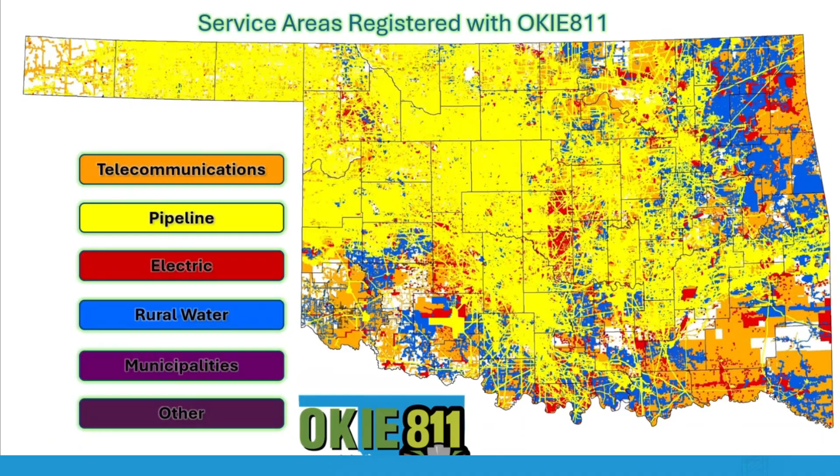Now, I'm showing you guys a digital map of all the underground assets in the state of Oklahoma. You're seeing all the utilities - electric, gas, water - and where they are in the state. You can see how much underground infrastructure is in Oklahoma. At the very end, it's almost all painted, like a kid with a crayon coloring the whole state.

That's how much underground infrastructure there is, and that's why it's so important to contact 811 before digging, because the chances of hitting a line are pretty high. I think it's a national statistic that every 6 minutes in the United States a line gets hit. That's how important it is to contact 811. We want to make sure you know where you're digging, to protect the underground and protect yourselves so you don't get hurt or something worse happens.

Now I'm going to turn it to my colleague, William Bohana, who's going to start with the 5 steps of safe digging. He's going to start with steps 1 and 2. Bo, the floor is all yours. He's going to start with step 1, plan and prepare, and why it's so important to know that before you submit a locate request.

A very important key piece to any project is to plan effectively - if you fail to plan, you plan to fail. Before submitting a ticket, it's important to get all kinds of information, because this is where a lot of problems can start well before digging begins. You must take time to identify where and when you will be digging. Consider walking the site, looking for signs of potential hazards, not only utilities themselves but environmental hazards as well. You want to understand exactly what you're doing and consider all kinds of potential issues that can come up.

If it's weather, because it's Oklahoma, give it 5 minutes and it'll change. Considering potential access issues is important too, because locators need to go in and get their job done. If you're working in a rural area with livestock, that can be an access issue for the locator. Of course, you want to gather all of your details to make a complete and accurate locate request - location, driving directions, what type of work you plan to do, all of that.

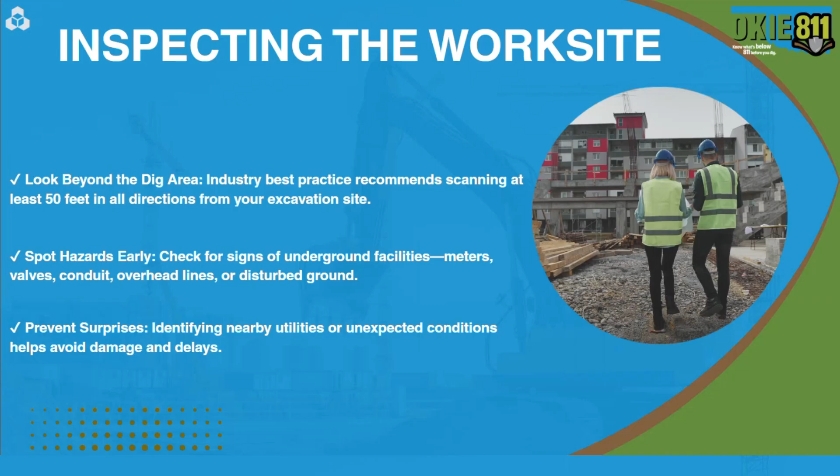So talking a little bit more about that documentation, you want to do your homework. This is still planning and preparing, getting those land records, GIS maps, survey drawings, plat maps, and you can request those through OKIE811 as well. Having that information is going to help set up the next steps to be successful.

You won't always know what's below. This is why it's important to pothole and plan effectively when working around utilities. But these tools can help you identify those potential facilities in that area.

A big one we'd like to talk about that is very important is to document. We want to make sure we have our job hazard analysis, our emergency action plan. You want to make sure your SOPs are ready to go. I know it's a lot of buzzwords and jargon, but it is important and it does have its place on the work site. Having that documentation and having a timeline can help if something does happen and there is an issue. Who do we contact? What do we need to do? What steps have been taken afterwards? So all of that documentation can help everything you found about that site to be more easily communicated.

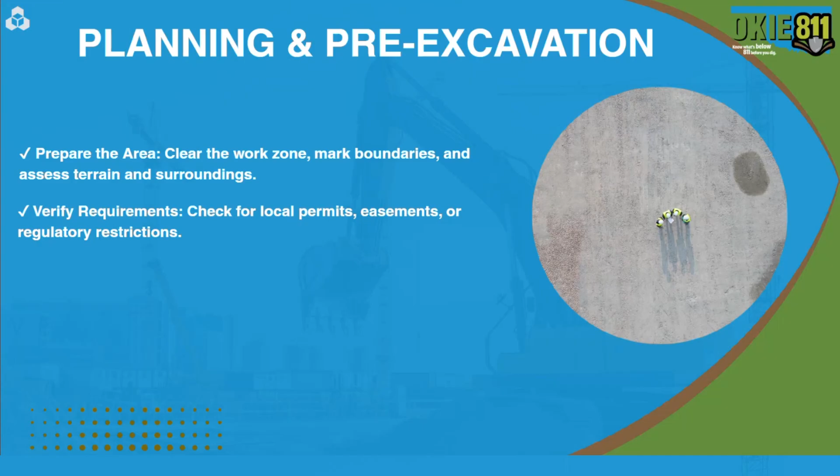Again, having a plan, very important. Emergency action plans save lives. Accidents happen. Having steps to address that is very important. Of course, planning effectively is all about mitigating those accidents, mitigating those hazards, making sure everything can go as streamlined as possible. But like I said, accidents do happen, and we're at that time of year where we're hitting triple digits. If you're working outside, heat stress related incidents occur quite a bit. So emergency action plans are always helpful for a variety of issues.

Now, white lining, and I'm going to ask you all to participate in the chat here. White lining the site using paint flags, other approved methods, to mark a proposed dig area. How many of you white line? It is an industry best practice to white line. It's not a requirement, but it does help give a specific dedicated space for your excavation, as well as show those locators exactly where you plan to work.

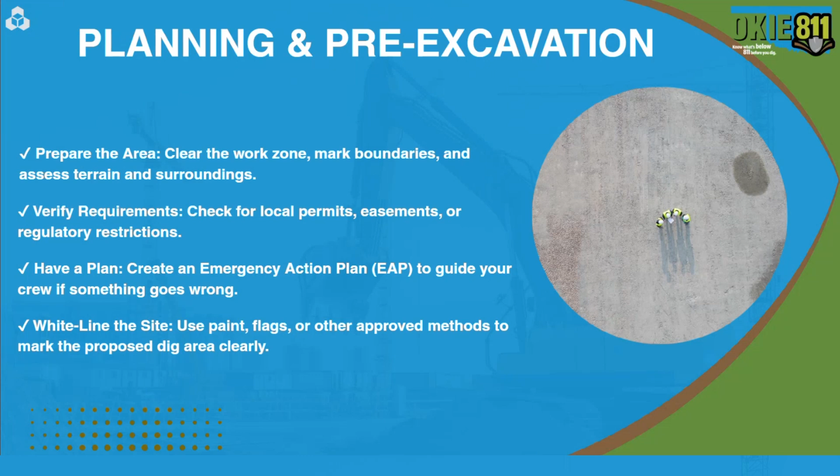So let's look at a couple of those examples real quick for that white lining. These are the three main examples: point radius, linear path, and perimeter. That point radius is great for installing a mailbox or planting a tree. It's just a single point that you use a white flag, or a great example, we were having a discussion with someone, and they said they just put a soda bottle on a tree because they were planning to remove that tree. It's something identifiable, something that they communicated with the locator that, oh, this is my quote unquote white lining, because it is very noticeable. So it can be another approved method of identification of where that area is going to be.

Linear path, great for a French drain. It is what it sounds like. You're just putting a line down and saying, if I'm putting in a French drain or an irrigation system, I'm going to mark out where that system is going to go in. I probably need about 2 feet either side of where the markings are.

And then perimeter all within, pretty standard. Great for a foundation, right? Mark everything within this box or this shape that I'm going to be installing a pool, putting in a shed, something that you can use more of a larger mass for.

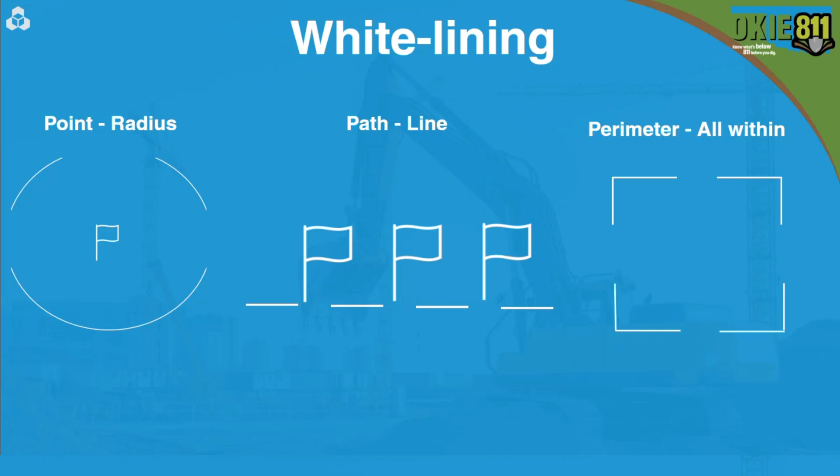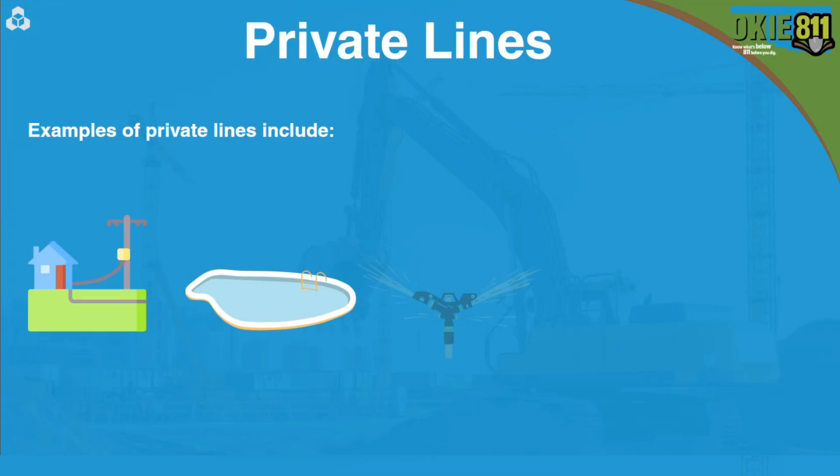Now, what about private lines? Talking about putting in that irrigation system or French drain, etc. There are a variety of private lines that can affect an excavation. That could be electrical lines from the house to an outbuilding, gas or electric lines for heating a pool, water lines for that irrigation system, or propane lines to grills or, in rural areas, even to houses. Any kind of lines that go after the meter are the homeowner or landowner's responsibility.

Now, talking about them, what do you do around these private lines? You have to have that conversation with the property owner to know where those lines might be, and determine whether or not that damaged line can be repaired safely on site, or if a private locator should come in. It is very important to have that solid communication if that work is being done.

So let's say a contractor suspects a private electric line runs through a backyard to a shed. The homeowner says, yeah, we do have that. So the contractor starts the conversation: do we know exactly where it is, how large it is, what can we do to work around that? It is the homeowner's responsibility to bring in a private locator if those lines need to be worked around. So having that communication, having that dialogue is very important, since those lines are the property owner's responsibility.

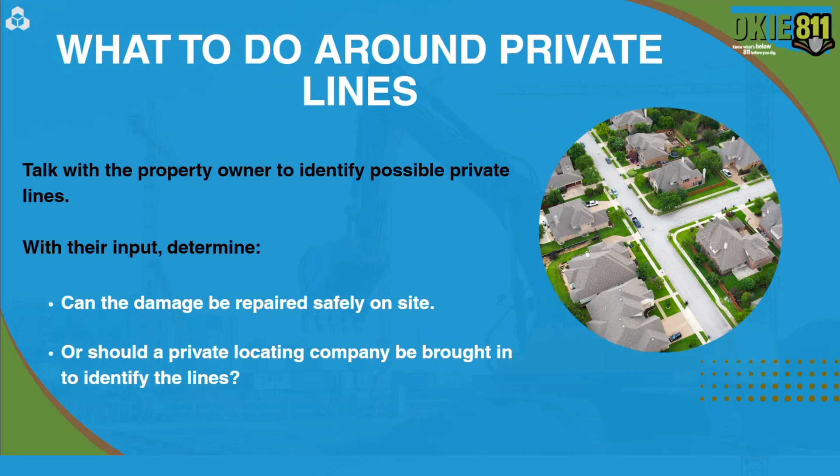Now, in the planning phase, OKIE has a couple of options for requests. For instance, pre-excavation meetings can be done online through the excavator portal, and we'll go through making a ticket in the next step. But here's a couple things to keep in mind when it comes to planning.

Not all projects are the same, but having a pre-excavation meeting helps you to coordinate with utility operators. This is a great option for large projects that will be multi-phase or will take longer periods of time. It helps to clarify the kind of work and scope going on with those projects, with utility operators in the area, and have discussions about conflicts that can arise, like certain junctions that come through or items like that.

Again, all of these resources, OKIE really wants to share with you that we want to be a resource for everyone in safe excavation. This kind of resource can help prevent delays and surprises. Consider a pre-excavation meeting when you're doing a large project or a multi-phase project, maybe unusual conditions, long timelines. This will help clarify a lot of that communication.

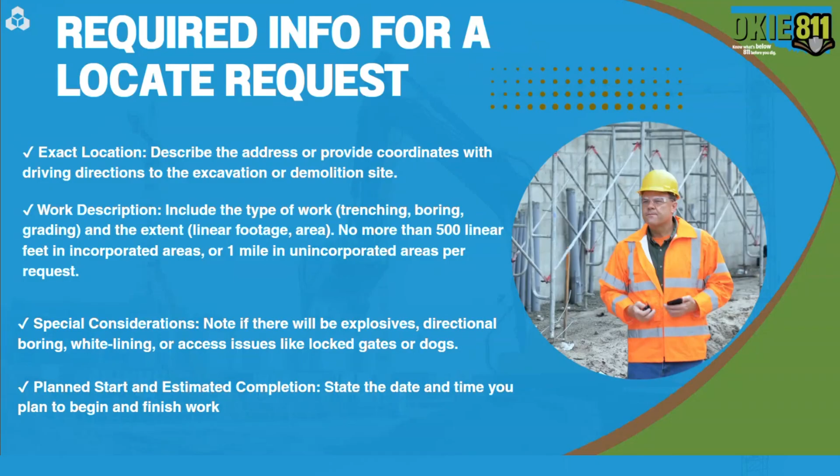So again, that planned extent, we're talking about all this planning for that start, the first 2 steps. All of your planning and communicating that through your ticket is very, very important.

So excavators should request locates for work that is actually being worked on or planned to be worked on. We can accept the planned start date up to 10 business days in advance. Again, those locate requests are only valid for 14 calendar days if that is a normal compliant ticket or an update ticket. Repeated requests for inactive or untouched areas may be considered excessive or unreasonable. According to the Oklahoma Underground Facilities Damage Prevention Act, an operator may recover its cost from an excavator for excessive and unreasonable requests.

Now, we got to mention here that putting in a ticket for an excavator, it's free, right? But there's still a cost to it. There's still a shared cost where the operators need to have the locators come out, have that equipment to get those lines, if their locators are in-house or if they have to contract them. So those costs behind the scenes are pretty real.

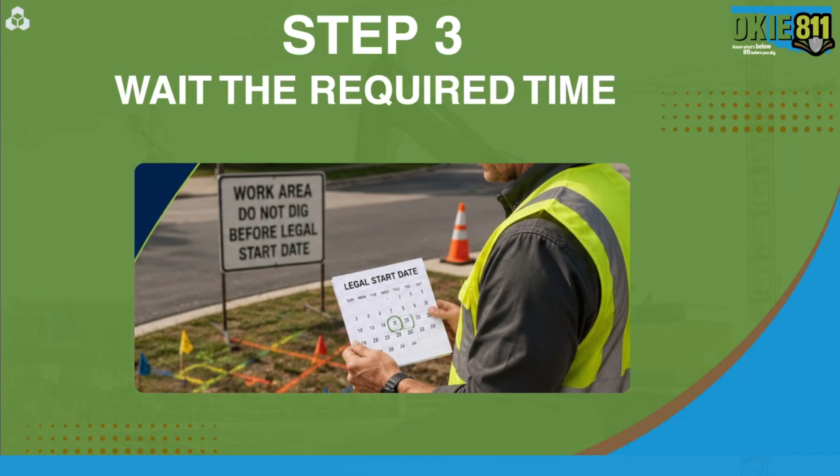Again, we want to let everybody know that this is a job that needs to be in collaboration. We all need one another to be able to do this the most efficient way.

Let's keep moving forward. Let's talk a little bit about the facilities operators' responsibilities. They have to participate in the statewide one call notification center - obviously us, OKIE811 - they need to be part of us so they can provide the information that is needed. They also have to keep their maps updated within the digital service area boundaries, up to date in the OKIE811 system. They have to keep those underground facilities that they own updated so excavators know what they're digging into, making sure they don't hit a line that, for example, was not registered within the 811 service, and then it becomes an issue. All those abandoned lines as well, they need to also keep those maps updated if they no longer have active lines. So the operator always has to be proactive in keeping their underground assets up to date so excavators know, and then none of those underground lines get damaged. Keep facility coverage and contact information current - that always is important.

Sometimes people leave jobs, and the contact information can no longer be the same. So we want to make sure that contact information is current in case somebody needs to contact this company, the excavator, and they get a hold of the right person. Keeping that information updated is always important.

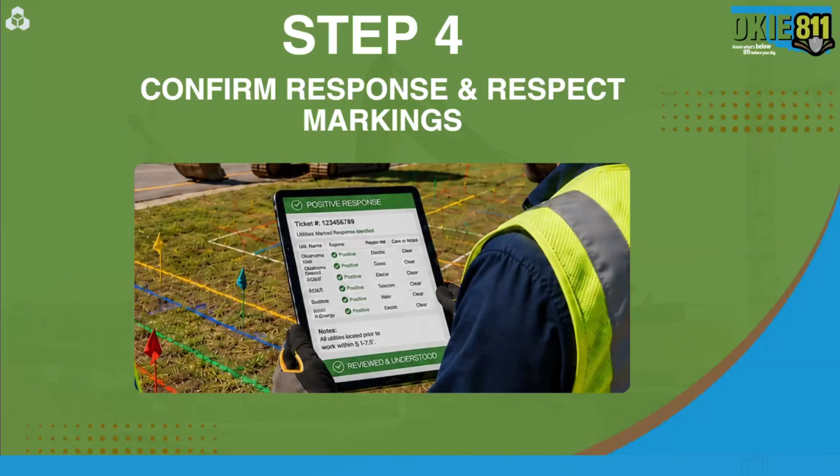Confirm response and respect markings. This is very important. Again, before you dig, use a positive response system to verify that every notified operator has responded. That's on your mobile, you can check your positive response on the OKIE811 portal. You cannot assume, it's your legal duty to check. That's very important. You don't want to assume things. Never assume, you never know what could happen. You want to make sure you check that positive response as an excavator, it is your legal duty, your responsibility.

Again, you could be the excavator on site and not knowing that response because maybe the office staff was the one who submitted the ticket, and that person gave the information to the manager, to the crew leader. Now this crew leader knows all the information about the responses, and he has to give that information to the actual excavator doing the job. So again, we're going back to that chain, that communication. We have to make sure that information gets to the excavator, that he knows our responses.

Now it's really important to confirm and protect all paint, flags, and markings on site. Despite not knowing the information, if you see the paint or the flags and markings, always respect those. Those are your eyes when it comes to excavation. If you don't have those markings, you're digging blindly. If the marks are missing or unclear, you go and request a remark before continuing. Now, if you have a project and everything is marked and looks good, but one side of that work site is not marked anymore because the wind blew it away, or something happened, a rain.

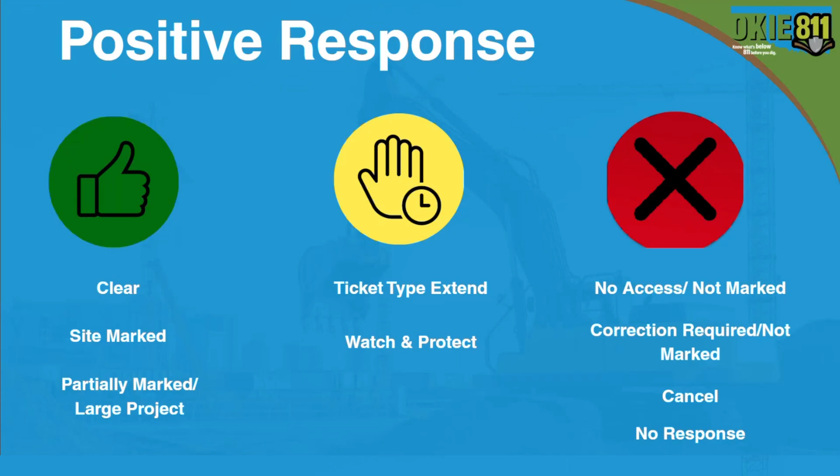Look for status codes like mark, no conflict, clear, or wrong address. That could happen. If any are missing or unclear, do not dig. Again, if your gut is telling you that something doesn't make sense here, please stop. That's the recommendation. Stop digging, contact the operator, contact OKIE811, or if there's a number on your response, contact that person so you can have more clarification.

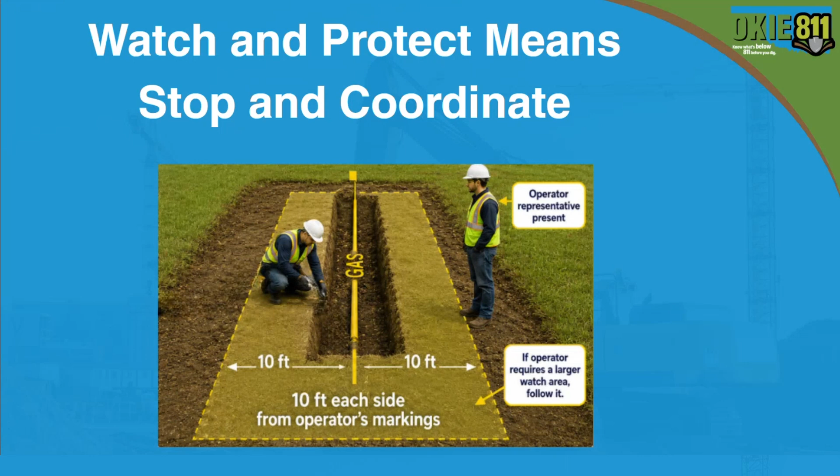Second and third notices: if one or more facility operators have not responded via positive response or mark, a second or third notice can be sent through OKIE811. Used to request compliance, not to extend the ticket's lifespan. Always check status on your ticket. Again, if one of the members has not given you a response and has not marked your site, you have to submit a second and eventually a third notice just to contact that member and say, hey, you know what, you haven't marked this area, you haven't given any response. So we do remind members as well that it's part of their responsibilities to respond to those locate requests that have been submitted.

State of emergency: we live in a state where things, weather-wise, can be tricky. We can get a lot of rain, tornadoes, you name it. So we always have to keep an eye on states of emergency if they happen. I think it was a bad storm in Norman a couple of weeks ago, maybe a week or two ago. I don't know how bad it was, but from what people I know in Norman said, it ended up being really bad.

Undergrounds can cross. They can go different directions, different depths, so you will never have that in your responses. Keep that in mind. That's why potholing is so important. Correct, locating and marking is not an exact science.

Use hand tools to dig test holes. Take your time. Try to expose that line, protect it and support it when you can actually see it. Make sure that you don't use any heavy equipment, and dig with caution. Take your time, don't rush. Sometimes problems happen when we're rushing, trying to get everything fixed and done on time.

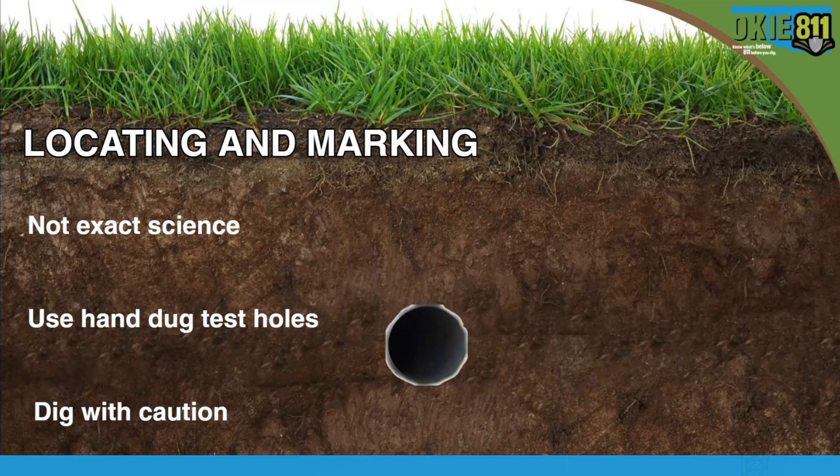And here's the colors, just a quick brief. Red is electric, orange is telecom and fiber, fiber's all over the place now. Yellow is gas and oil, green is sewer and drain, blue is water, purple is reclaimed irrigation, white is proposed excavation. It's an important one, even though it's not mandatory, that helps locators identify where the proposed excavation is going to be. So again, if you have the chance to white line an area, please do so. That will really help the locators find those underground lines.

And pink is survey. Respect markings: the marks must remain visible, and a valid, unexpired locate ticket must be on site. Always have that ticket number with you just in case something happens. Take a screenshot, write it down, have all that information in hand. Like Bo says again, document. It's kind of like his motto. Yeah, his motto.

My motto: document. If marks are not found where expected, excavation must stop, and the facility operator must be contacted via the notification center.

If you've seen something wrong, if you can't find the line, please stop. Take the time to contact 811 and say, hey, I've been trying to dig for a while, can we reach out to the locator? And if the locator left that information in the response, please contact that locator directly and let them know, or the facility operator, whoever that company is, and let them know, hey, I need to get this remarked on the ground again.

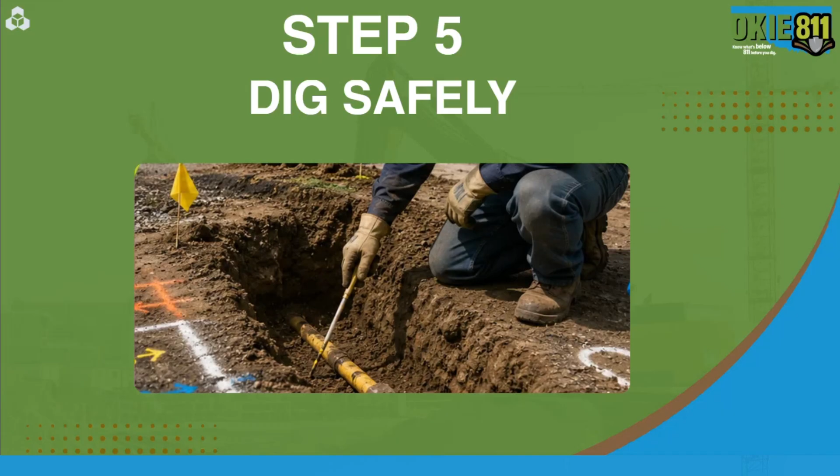Awesome. So we've gone through all of our steps up to this point, right? We've planned effectively for our excavation, submitted our ticket by contacting 811, waited the required time, and confirmed that positive response. Now you're ready to start digging, right? So we need to dig safely.

The tolerance zone in Oklahoma is 24 inches from the outside edge of any marked underground facility. That tolerance zone is the area around that utility. Within this area, you must use hand tools or non-mechanized methods, like a shovel or a spade, something that does not have a motor, visually confirming the exact location before using machinery.

You must be able to see it, support it, and secure it before using any machinery around that utility. Of course, proceed slowly and cautiously. Damage often occurs from rushing in that tolerance zone.

Part of my background, I did some certification in law enforcement a long time ago, and a topic we talked about quite a bit was don't create an emergency while responding to an emergency, right? So don't use time constraints for a project as an excuse to rush in the tolerance zone, it could create a whole other issue. Be sure to take your time in that tolerance zone to work effectively.

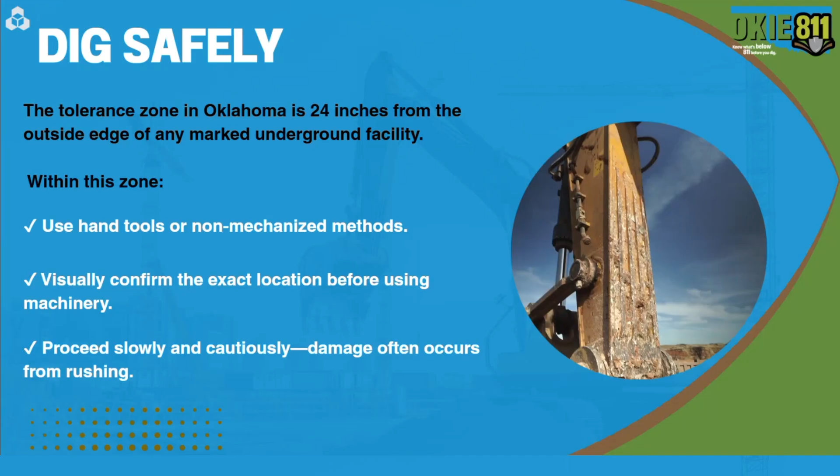So let's look at an example of what that tolerance zone looks like. Here we have our excavator using a hand shovel to work towards that utility. You can see the tolerance zone is defined here with those spacers, but machinery must be used outside of that tolerance zone, just using hand digging, soft digging techniques.

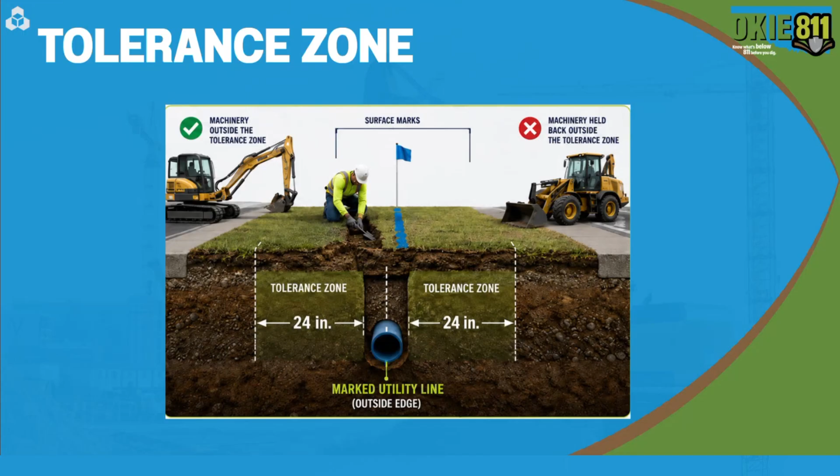It is important to pothole within these areas as well. You can see that the surface marks aren't going to be exactly where that utility is. So consider your utility marks as that primary generalized concept of where your utility is, and pothole within that area to locate that utility. Try to do that every so many feet to find that direction and depth, and be sure that all of that is visualized before using any other methods. You must secure, visualize, and support those lines if you plan to use machinery around those utilities.

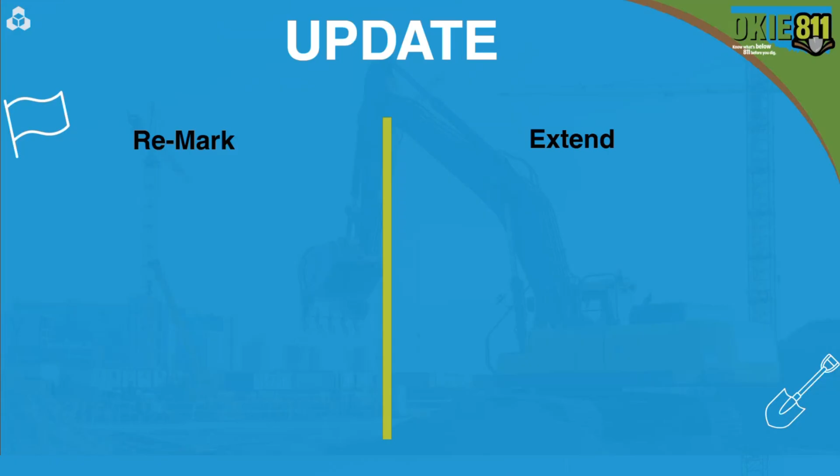All right, so you're digging, you're working on your project. Maybe a couple of things happen, like good old Oklahoma weather, and you need to update your ticket, right? So you have options of remark or extend. An extend is if the excavation needs to go on for another few days outside of the life of your ticket, this will update the ticket.

For a remark, you're still working in the same area, still have the same scope, still working on everything that was in the original ticket, but your marks have become faded or disturbed. They're unclear, you can't recognize them immediately. This is when a remark would be valuable.

Do not start any work until those marks are refreshed. So if you are working in a specific area and it's rained, you need to re-excavate, restabilize the area, and those marks have washed away, this is a great opportunity for a remark. You need to make sure that you can visualize everything so that work can continue as safely as possible.

This just ensures continued accuracy for safety. This gives us those steps and measures so we aren't digging blindly, right? Now, an extend is very similar. This is if that work is still ongoing and you need some additional time within that original ticket. Both of these updates must be made before that ticket expires.

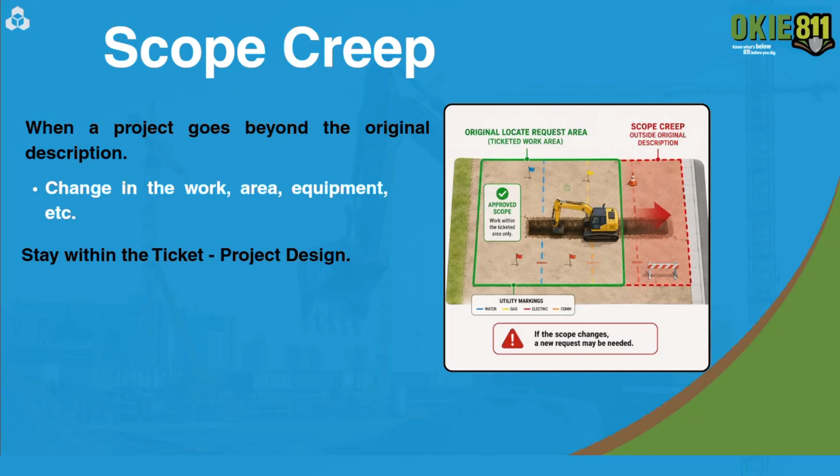So you need to stay within that ticket, right? Strong planning, we started step one. This is a big deal in excavation, starting with strong planning to prevent those future issues from occurring, right? Understanding those ticket limitations, using the right ticket at the right time, having all of that planned out ahead of time to prevent delays and damages.

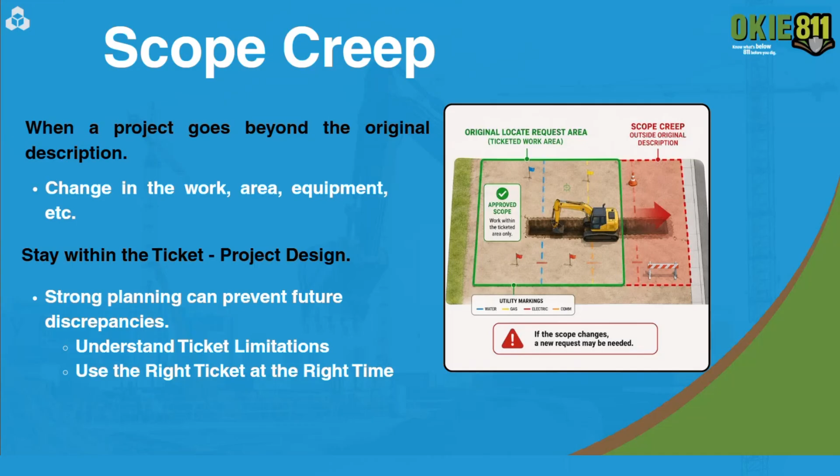Anything that changes that physical state of the line is considered a damage. So a dent, scrape, scratch, any damage to the coating of a line, this is a damage. It is important to notify the utility operator and Okie 811 when that happens, because that dent or that scrape a few months or a few years later can break down the line and cause an issue later. So it is the responsibility of the excavator, when any damage is observed, to report that.

So, for instance, maybe a crew is trenching and it scrapes the coating on a gas line, or you're hand digging and scrape off part of the coating on that gas line. That is a protective coating to keep that line from corroding. It still needs to be reported. Even though it may seem minor, it is something that can affect the line over time.

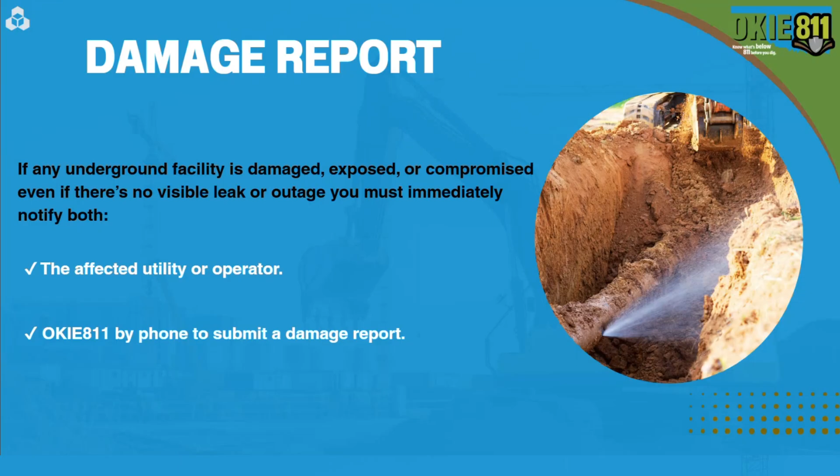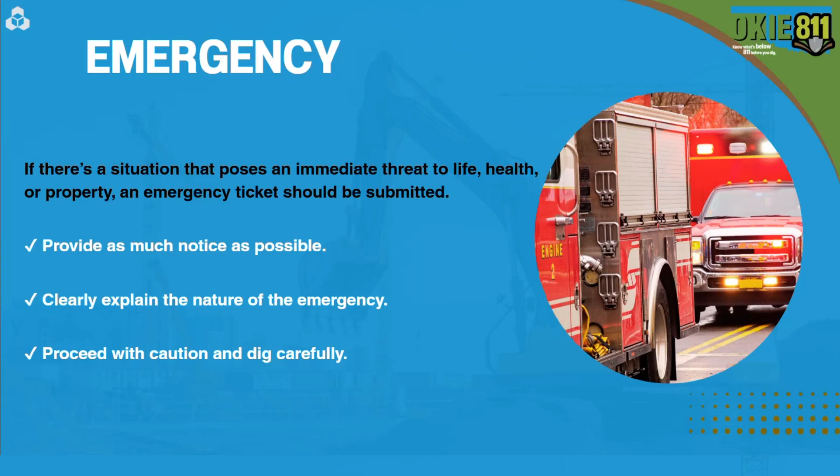So in emergency situations, we don't like to see them, but sometimes things go wrong. There are certain things that are out of our control sometimes. So what do we need to do when things go wrong?

Oklahoma law requires immediate notification to that facility operator and Okie 811 if damage occurs to a utility. If that damage happens to cause an emergency, like gas release or maybe striking an electric line, things like that, you must notify that operator and Okie 811. So, of course, evacuate the area, contact 911 if there's a release of flammable, toxic, corrosive liquid or gas, and notify that utility operator of any facility damage that had been occurring.

Allow the emergency personnel of that facility to come and handle any kind of damages. Do not try to correct any damages that you may have caused or that may have been caused through other means. Leave that to the professionals, the individuals who have the equipment to make that correction or repair, because they're going to have the tools and the means to make that an effective repair.

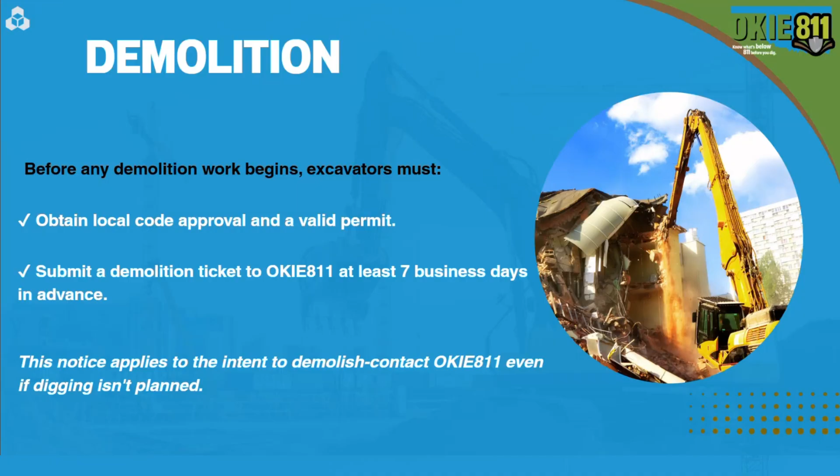So let's reflect. It is the law. Before you dig, under the Oklahoma Underground Facilities Damage Prevention Act, you must notify Okie 811 before digging, providing that 3 to 10 business days before putting the bucket in the ground or the shovel in the ground.

It is the excavator's legal responsibility to check for that positive response before digging, to respect the tolerance zone using soft digging, hand digging methods, non-mechanized within the tolerance zone. And of course, the enforcement authority for safe excavation is not Okie 811, it's the Oklahoma Corporation Commission.

So let's take a quick recap of the 5 steps of safe digging, and then we're going to do a little activity before jumping into our exam. So here's a quick recap.

Step number 1 was plan and prepare that work site. Walk that site, gather the details that you need, plan and prepare effectively, white lining, having your emergency action plan, job hazard analysis, and timelines, right?

Step 2, contacting Okie 811, submitting all of your information that is accurate, full, and complete for your locate request, having the right ticket, and including all those scope items.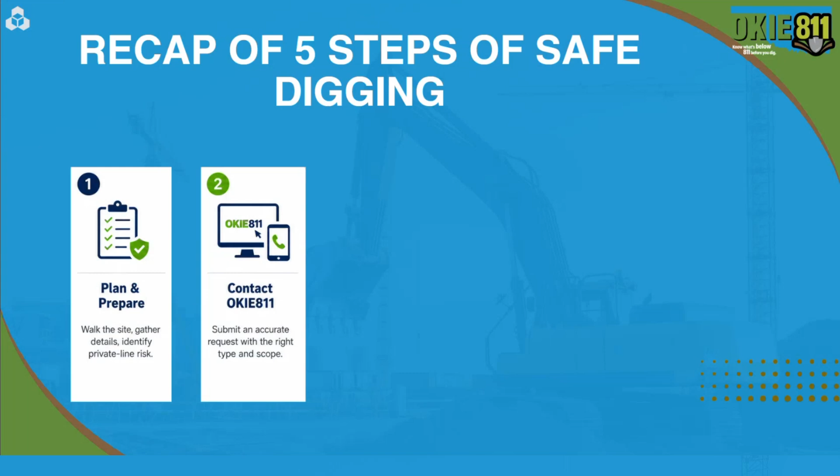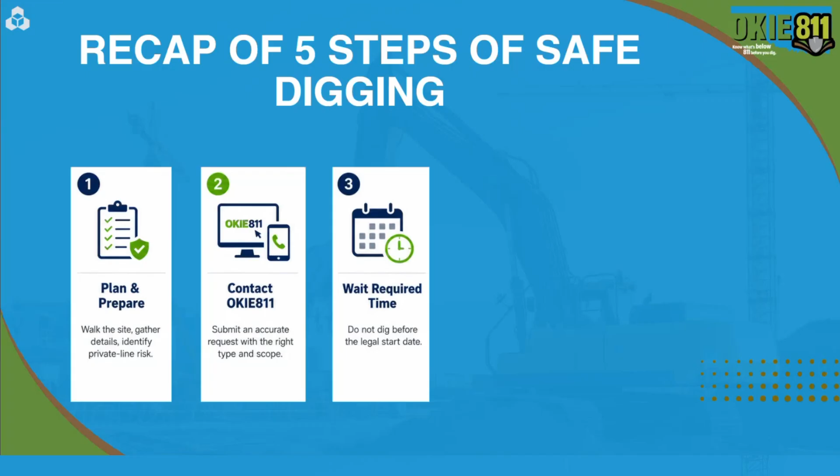Step number 3, waiting the required time. That time frame that is given must be adhered to. Cannot start digging until you've confirmed your positive responses and have your work to start date.

So step number 4, confirming those positive responses and communicating that status, making sure that everybody knows on that crew. And then step 5, respecting that tolerance zone, respecting that work to start date, and digging safely, not using those mechanized means.

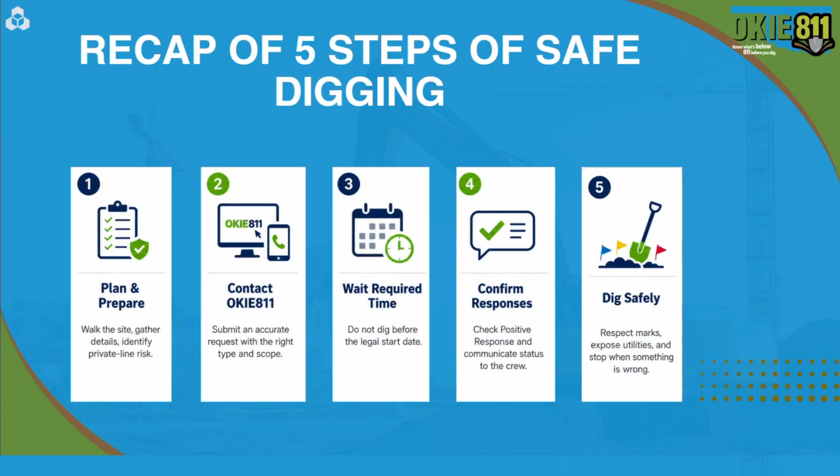So let's do a quick little activity, and Luis, you got us for responses. Excellent. So meet Marco. We're going to apply these 5 steps of safe digging to Marco's work.

So he's looking to manage a pretty big project, right? His project is that he's working in this Maple Industrial Park. They're installing 1,200 foot in a utility corridor. They have a pretty large project, and this goes outside of that ticket scope.

Going into making a ticket, right? There are going to be handoffs, and so there might be different ticket requirements, different needs, different scopes, right? But we're only focused on phase 1, and we're breaking apart this massive project into one item here.

So this is our location at 100 Maple Avenue. The work is going to be a 420-foot trench, maybe a short bore and potholing. So we're going to focus on just laying this one line in, right?

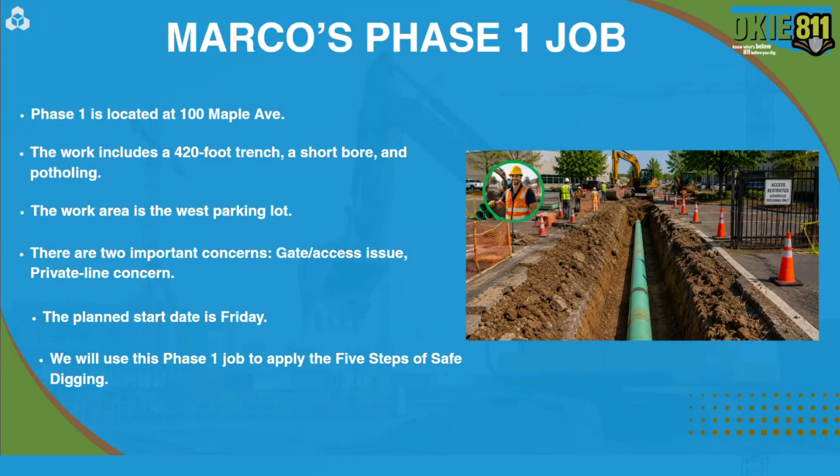All right. So next slide, Bo, would be for you guys to identify those 5 steps in this Marco's phase 1 job. So step 1, who can give me in the chat what is step 1? What do you need to do when it comes to getting ready for a project? I'll give you 5 seconds. If not, I'll give you guys a hint.

Bo, give me the first hint. So what's that little guy doing there on that step 1? Anybody can answer? Let's see. Planning, prepare. Good job, Lori. Yeah, nice. Casey, gather details and locations of drilling and excavating. Yeah, excellent, excellent. Good job.

Give me another options, Bo. Let's see what else. Those are the answers. Good job, guys. There's another one. Let's get your documentation. You have to do a J-what or an action emergency. What do you need to do? Identify private utility. Yeah, good job.

Yeah, you have, nice, to have all your requirements. Job safety analysis. What is also important, if something happens, what if fire is going on and you have your crew, you have to have some sort of a document, right? For those kind of situations. If something goes super wrong. Yeah, something goes wrong, it's something that can save lives. All details needed. Good job, nice.

Russell, what is that one? There's 2 important ones in step 1. Yeah, an emergency action plan. That's good. And plan, consider potential access issues. Good job, Linda. That's important for locators. Verify local permit requirements. That's good. Good job, Casey. Those are very important before you actually not only start, but before you submit a locate request.